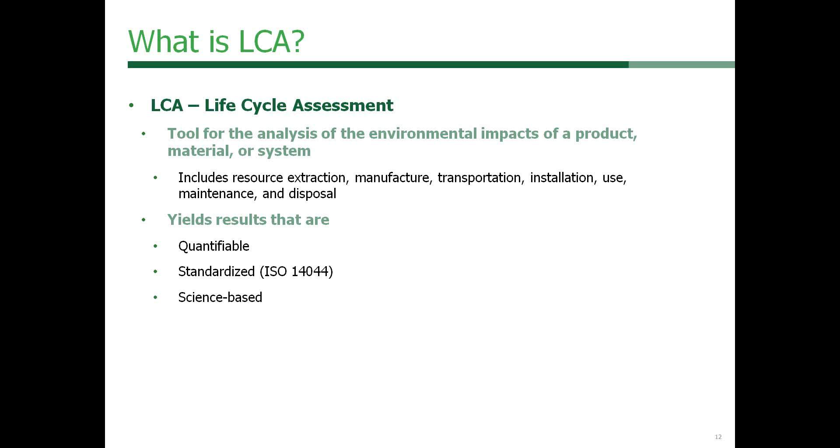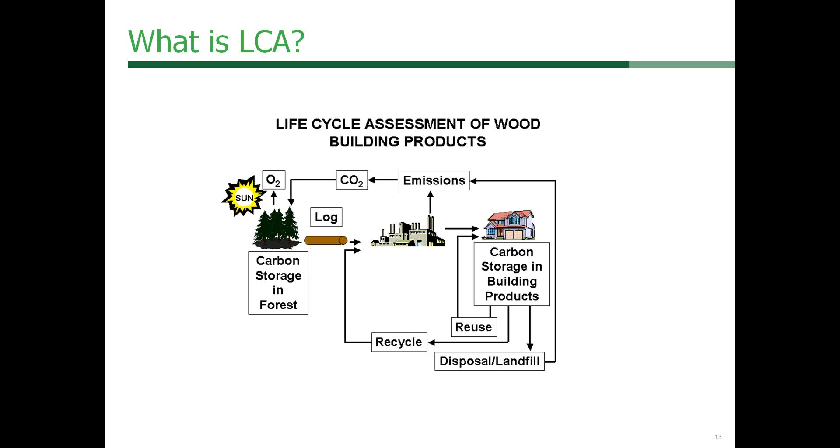So what tools do we have for life cycle assessment? The National Green Building Standard says that all tools used in LCA must be ISO 14044 compliant. They do have a provision for equivalent standards, but for the most part we're going to stick with the ISO standards since they are the most well-known and widely accepted.

Some of the more common LCA programs are SimaPro, GaBi, the Revit plugin Tally, the Athena Impact Estimator, and NIST's BEES program. SimaPro and GaBi are very comprehensive LCA programs and may produce more results than required for the NGBS analysis. Programs such as Tally and the Athena Impact Estimator are more commonly used by engineering practitioners for their simple user interface. For those of you already using Revit as part of your building information modeling scheme, Tally is a simple plugin that interfaces with Revit and allows you to perform an LCA rather quickly. Athena Impact Estimator is a free program available on Athena's website and can be used for whole buildings or products and assemblies.

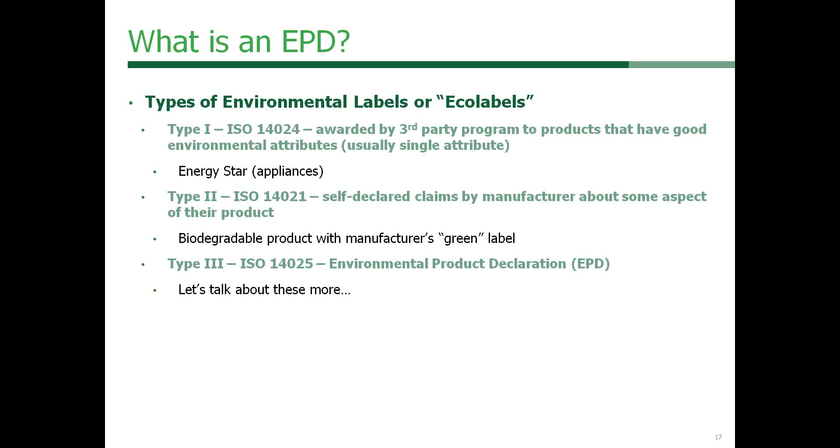A Type 2 eco-label is a self-declared claim by a manufacturer about some aspect of their product. For example, a biodegradable product with a manufacturer's green label would be a Type 2 eco-label. Type 3 eco-labels are known as environmental product declarations. These are governed by ISO 14025, and we're going to talk a little bit more about these.

The definition of an environmental product declaration, or EPD, is a concise, standardized, independently verified report on environmental performance. ISO has several standards dealing with EPD development. For us, the relevant ones we deal with are ISO 14025 for Type 3 EPDs, ISO 14040 and 14044, which govern life cycle assessments, and ISO 21930, which are the product category rules and EPD for building products.

So the EPD process can seem a little long and convoluted, and it is certainly not something that happens overnight. You start with your program operator, who then has general program instructions and product category rules which dictate how the LCA is performed. In turn, the LCA guidelines can influence the product category rules. This then leads to the development of an EPD, which is verified by an independent third party.

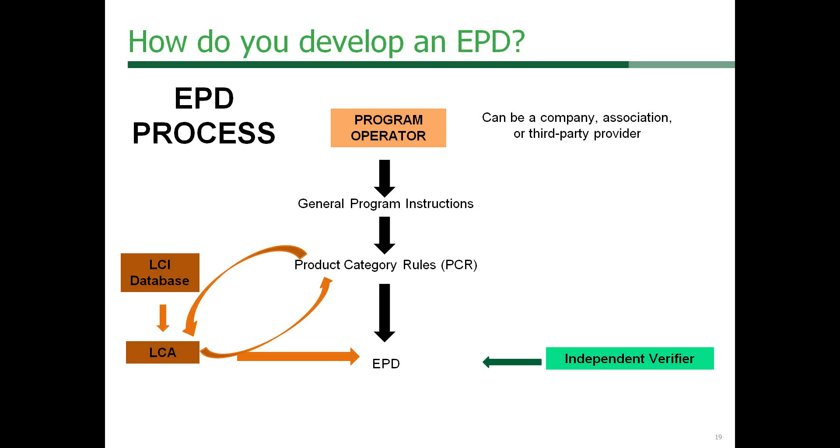The responsibilities of the program operator are set out in ISO 14025, and they include to adopt, adapt, or develop product category rules as necessary, review and verify the EPDs, and ensure all standards are followed. Typically, a program operator retains a third-party verifier for the verification of EPDs.

The American Wood Council and Canadian Wood Councils chose UL Environment as our program operator in the development of our EPDs for wood products.

Product category rules specify parameters to be considered for a given family of products. The North American PCR was developed by an organization called FP Innovations, who in turn based that PCR on the one from the Norwegian EPD Foundation and the German Institute for Construction and Environment. UL Environment then adopted FP Innovations' PCR for North American wood products.

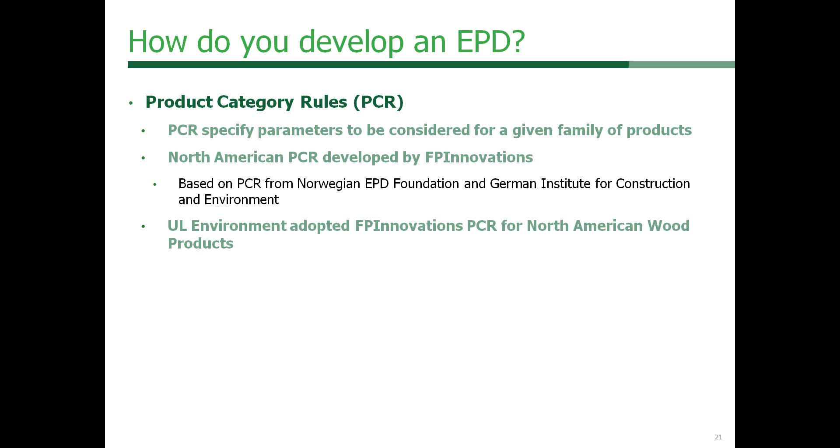So in order to produce consistent LCA studies for similar products, a PCR provides system boundaries for the assessment. This is how a PCR ensures consistency and, in some cases, comparability of EPDs across a category of products that serve the same function.

Our life cycle inventory data was collected by a group of university researchers known as CORRIM, the Consortium for Research on Renewable Industrial Materials. CORRIM started collecting data on various stages of forest products harvest and manufacture back in 2004, and then further broke that data down into modules that reflect the environmental impacts of harvest and reforestation, transport of logs, and manufacture of wood products in various regions. CORRIM then developed the LCA reports necessary to comply with the PCR requirements, which led to our EPDs.

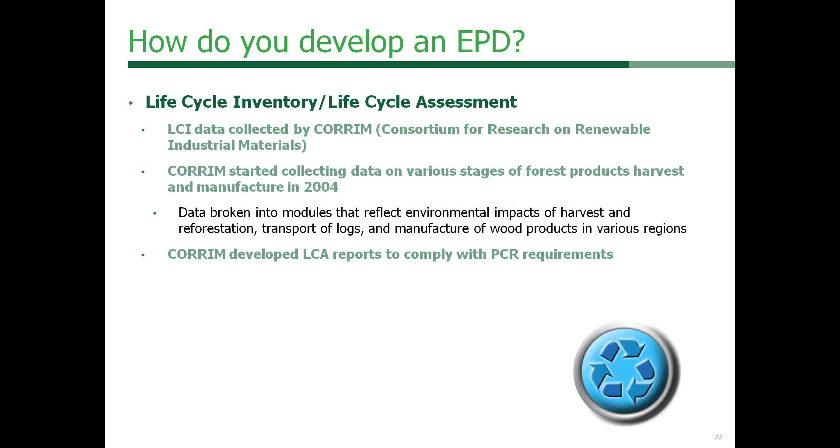So, as I said, the EPDs are based on these LCA reports, and EPDs produced under the FP Innovations ULE product category rules report global warming potential, ozone depletion potential, acidification potential, smog potential, eutrophication potential, and some additional LCI data including primary energy consumption, material resources consumption, and non-hazardous waste generation.

So, next we'll talk about EPDs for the North American wood industry. The American and Canadian Wood Councils have published 9 EPDs so far for softwood lumber, softwood plywood, oriented strand board, glue laminated timbers, LVL, wood I-joist, medium density fiberboard or MDF, particle board, and redwood decking, which was actually developed in cooperation with the California Redwood Association.

Additionally, the Western Red Cedar Association has an EPD for cedar siding, giving a total of 10 EPDs for wood products. Additionally, we have 2 pending EPDs that we anticipate on releasing soon, one for LSL and one for fiberboard.

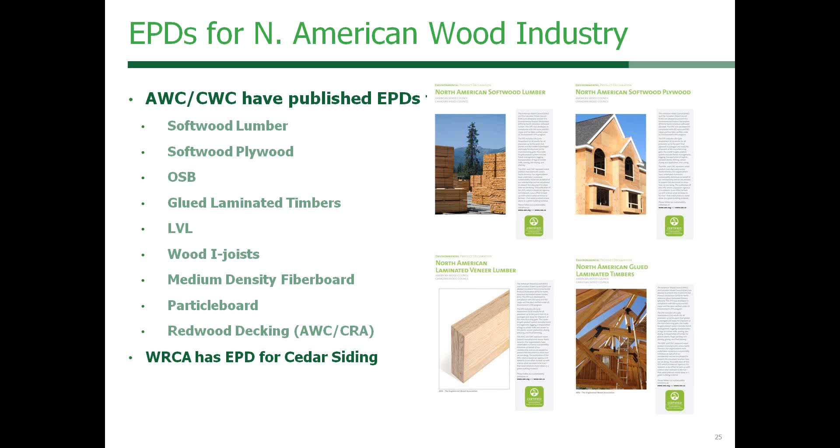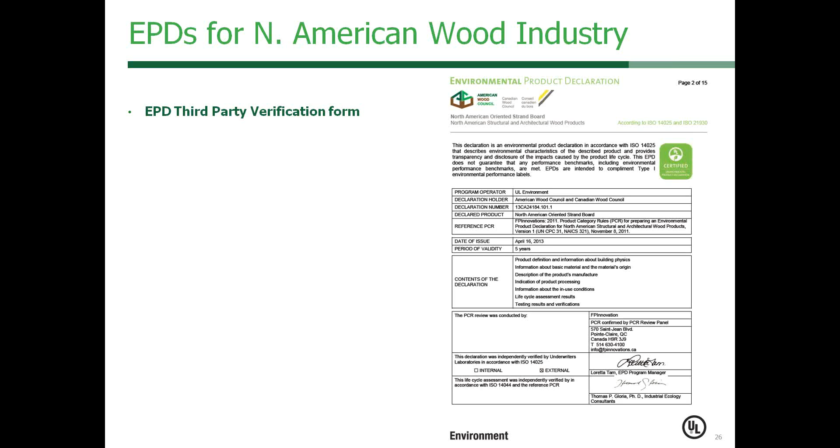Most of our EPDs are business-to-business, or B2B, in scope. The exceptions being redwood decking and cedar siding, which are business-to-consumer, or B2C, in scope.

B2B scope is also called cradle-to-gate, and B2C scope is called cradle-to-grave. Cradle-to-grave scope indicates the LCA accounts for all life cycle stages from resource extraction through the manufacturing and use stages, all the way to the end of life stage. However, the multitude of potential uses for wood products makes a cradle-to-grave EPD nearly impossible, as it's very difficult to ascertain how folks are going to use their wood product.

With this in mind, we developed ours as cradle-to-gate, meaning that the resource extraction and manufacturing phases are included in the LCA, and the system boundary ends at the manufacturer's gate where the product is ready to be shipped.

The LCA system boundaries are shown in the EPDs and show what's included and what's not. The system boundaries are specified in the product category rules. The results of LCA studies are very sensitive to these system boundaries, and different boundaries can give different results for the same product. For example, seedling and greenhouse operations are not included in our EPD. However, planting, including the preparation for planting, is included in our EPDs. Again, these are specified in the product category rules.

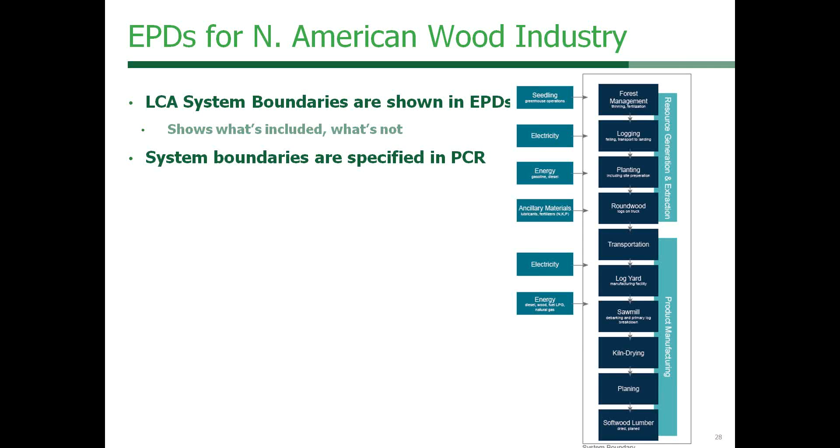How are EPDs used? One of the main uses right now is in green building certification programs. LEED V4, the most recent version of LEED, has a materials and resources credit up to 2 points out of 100 that can be earned using EPDs. Green Globes will allow you to earn up to 20 points, although obviously this is on a much larger point scale. It also allows designers to make informed choices about their building products and allows manufacturers to analyze areas where the products perform well versus opportunities for reducing potential environmental impacts.

EPDs cannot be directly compared if the scope is different. However, if they are based on the same PCR, they can be compared.

So we're going to pause here for our second poll question.

Oops, sorry, I always forget to take myself off mute. I am so sorry about that.

No worries. All right. All AWC EPDs are B2C, cradle to grave in scope. True or false?

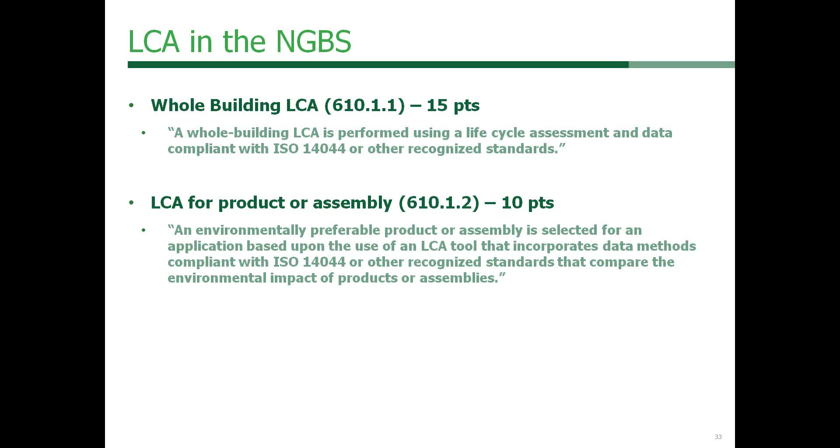So we're going to start with the smallest and work our way to the largest. A product LCA requires you to compare 2 or more products for improved environmental impacts in fossil fuel consumption, global warming potential, acidification potential, eutrophication potential, and ozone depletion potential.

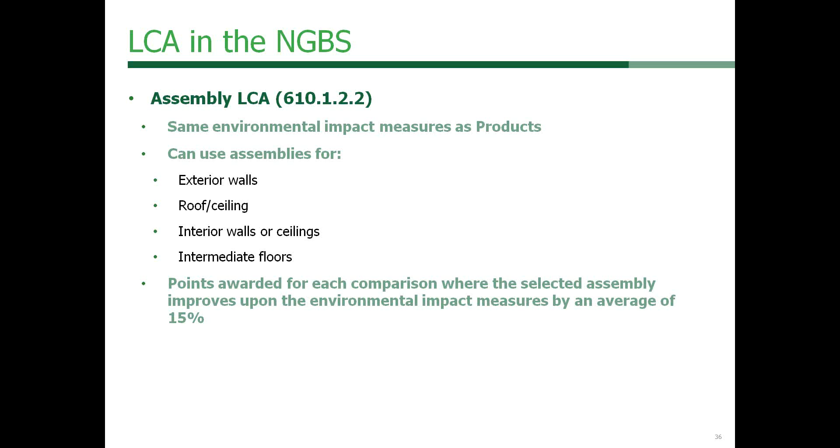An assembly LCA uses the same environmental impact measures as the products and allows us to make comparisons for 4 different assemblies: exterior walls, roof ceiling assemblies, interior walls or ceilings, and intermediate floors. Points are awarded for each comparison where the selected assembly improves upon the environmental impact measures by an average of 15%.

Similar to products, the assemblies earn points based on the number of assemblies and the number of impact measures. So for 4 different types of building assemblies, each with improvement in 5 impact measures, we can earn up to 10 points.

Each impact measure does not need to improve by 15%, just the overall average. So if you have a product or an assembly that has improvement in 4 impact measures, but for whatever reason shows a negative improvement or is worse in 1 impact measure, that doesn't mean you can't use it to earn points. You just will only get the credit for the 4 impact measures.

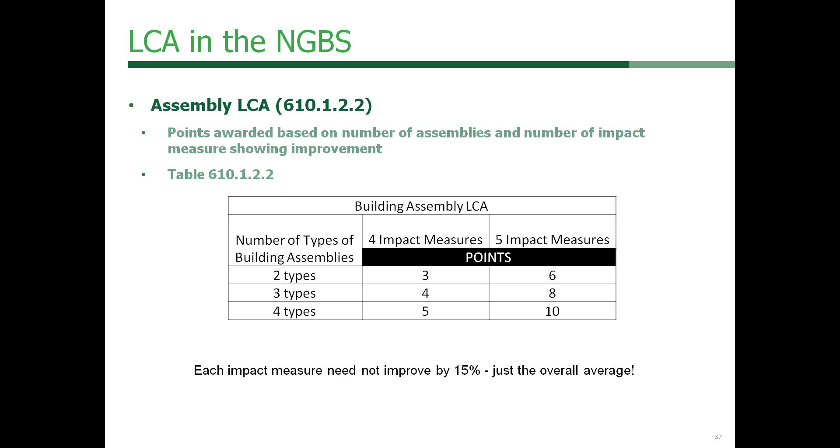All right, global warming potential is not one of the impact categories that must be compared between LCA analyses in the NGBS. True or false? I'm so glad you all start voting before I finish, so that's great.

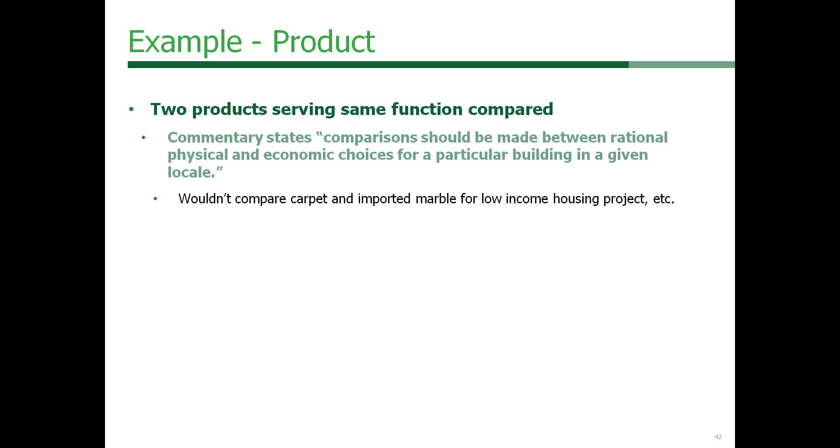Now, there aren't any code requirements. However, the commentary does state that comparisons should be made between rational, physical, and economic choices for a particular building in a given locale. So if you're doing a low-income housing project, you don't want to compare carpet and imported marble for a flooring choice. You would want to do a more rational comparison, such as carpet and laminate flooring, perhaps.

And the first thing that you need to do is select the weighting. Now the weighting in BEES can be very subjective. You can choose no weighting if you prefer that, or you can choose the BEES stakeholder panel weighting. They also have custom user inputs available, so you can choose any weighting or no weighting if that's what you prefer. For our comparison, we had to select a major element, so ours falls under the shell major element.

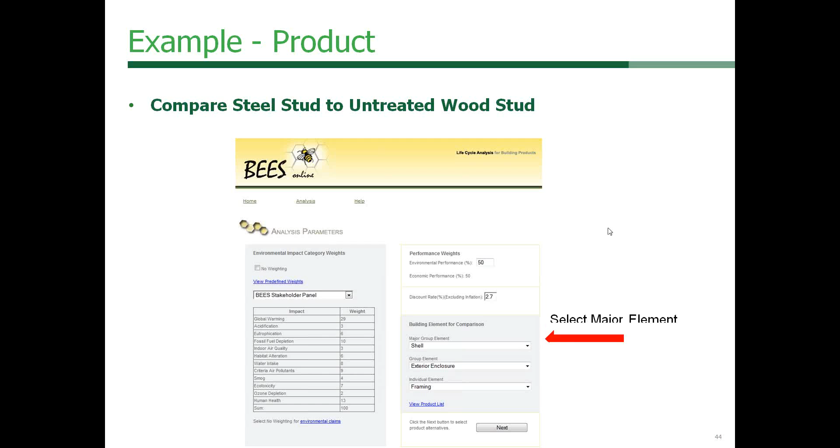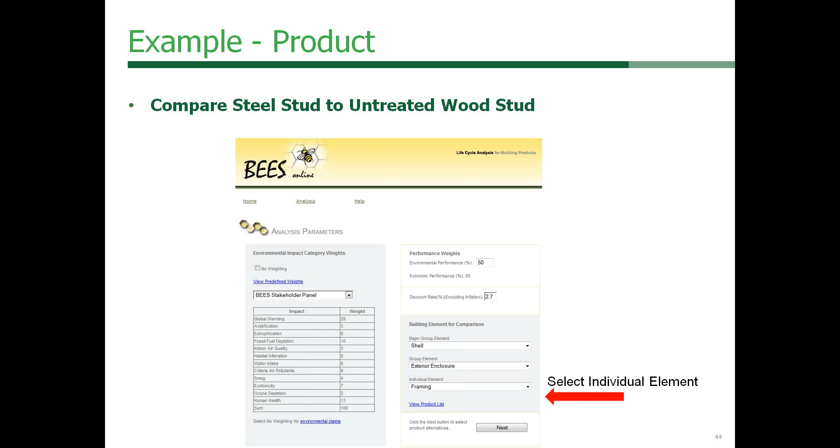And an exterior enclosure group element. For this comparison, our individual element is framing. So then we click Next, and it gives us some product alternatives.

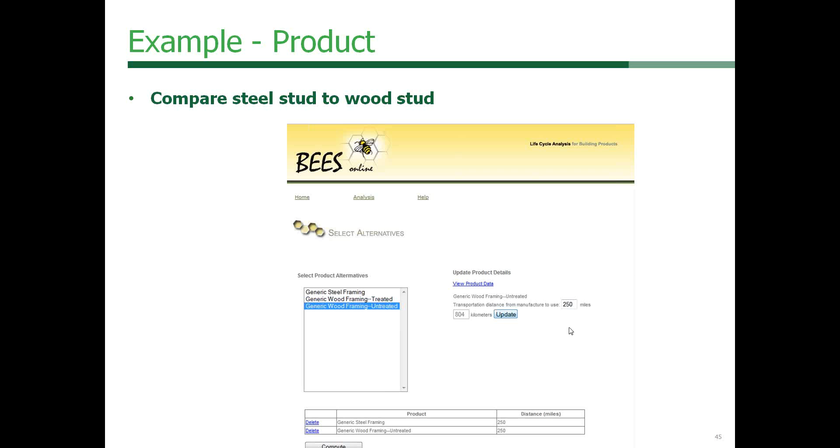For this comparison, we chose a generic steel stud and a generic untreated wood stud with a transportation from manufacturer to use of 250 miles. After selecting the products you wish to compare, you simply click Compute, and BEES will give you some results.

All right, I see we have a question coming in.

What is the process of defining the default product assembly to which we compare our design? This is actually a very good question and something that a lot of folks have struggled with. There's no process that's actually defined in the standard, so you can choose any product to compare against your final product that was selected. However, you want to make sure that it's a rational comparison.

You don't want to be comparing something that you want to use in your building with something that there is no way you would ever put in your building, such as comparing carpet to marble flooring for a low income housing project. So it's up to the designer to choose your baseline or reference material, but the NGBS does want you to be rational about it and not use an unreasonable product to compare for your project.

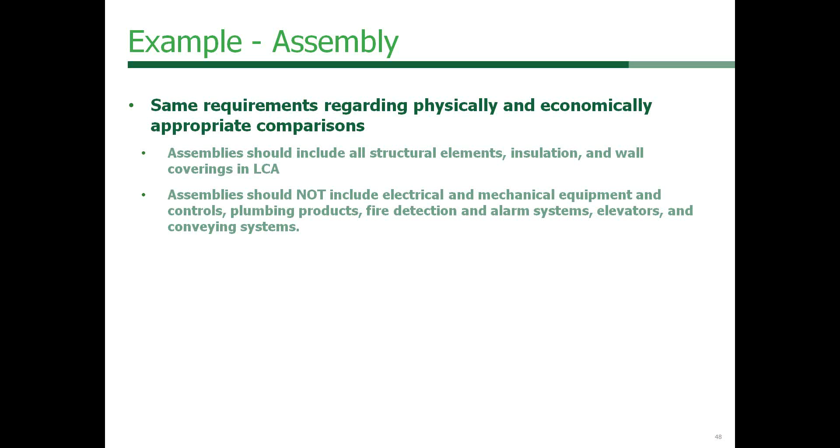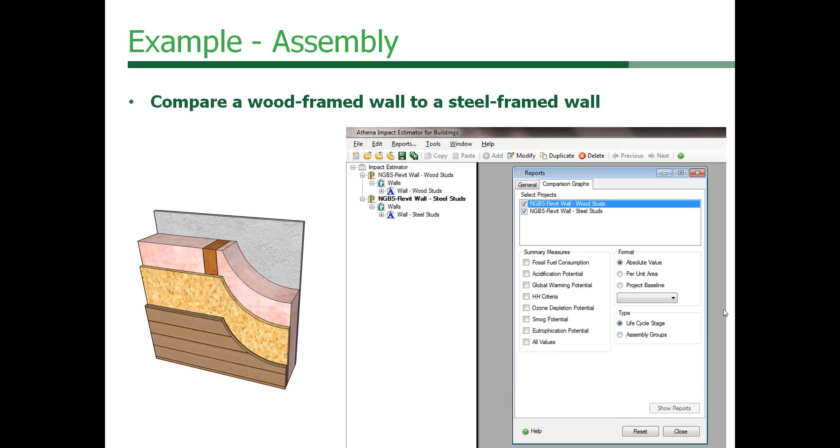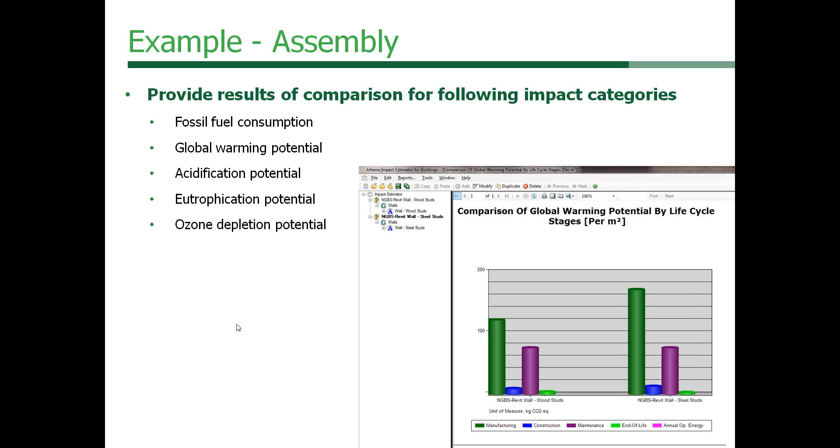Our last example is our whole building LCA. This is the most rigorous, but also worth the most points. As I mentioned before, in the 2012 NGBS, no comparisons are necessary. You simply have to perform a whole building LCA with an ISO 14044 compliant tool.

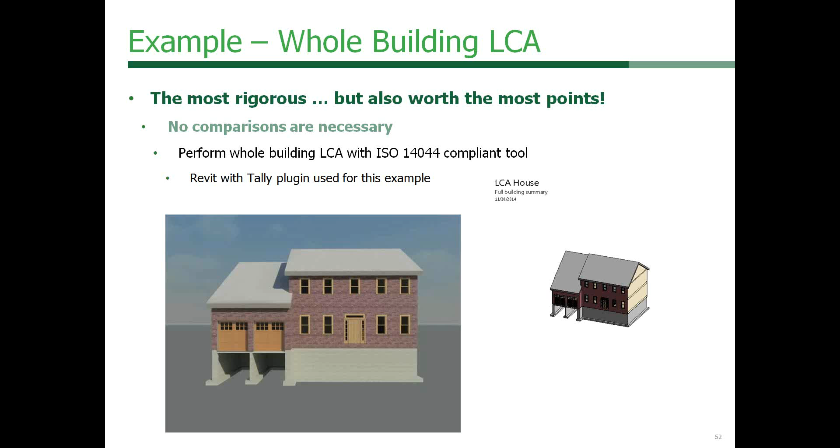For our example, we used Revit with the Tally plugin. One thing that Tally doesn't include is on-site construction impacts. So if you're trying to build two LCAs using, for example, Tally and Athena, you can run an LCA on an identical assembly or structure, and you'll get different numbers. One of the reasons for these differing numbers is the inclusion of on-site construction impacts in Athena, but not in Tally. So Tally does not include the on-site construction impacts.

So the Tally interface is just a plug-in on Revit. You'll build your building model in Revit, and then you can run your environmental impact assessment or life cycle assessment of your environmental impacts in Tally. You'll be able to choose what you want, any materials that are necessary to include.

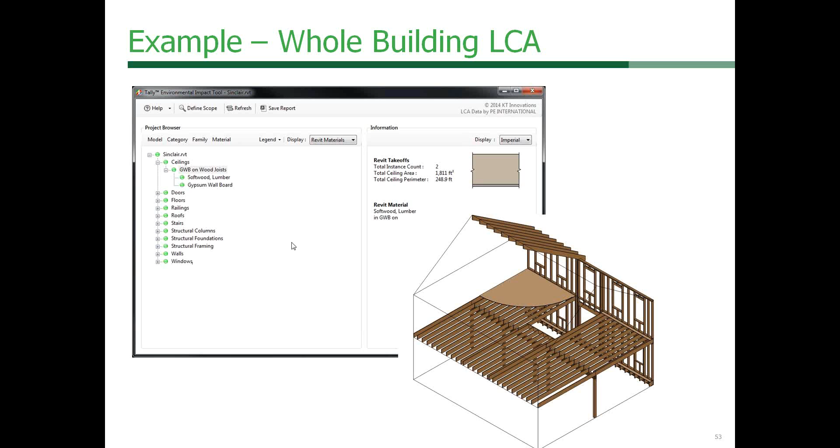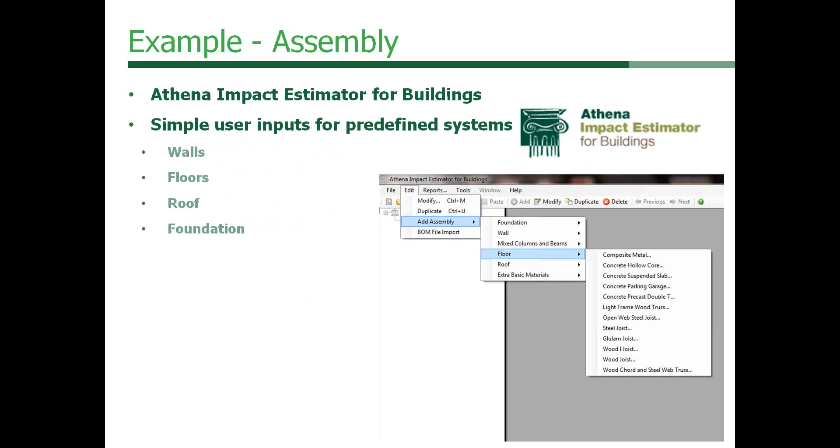So, all right, and then from there, we have our fourth poll question. Which of these LCA options does not require a comparative analysis between two or more options? Is that A, whole building, B, product, C, assembly, or D, component?

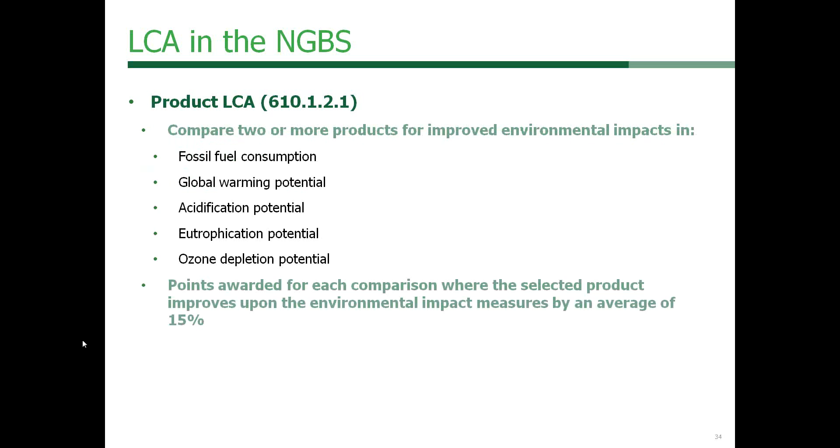Yeah, I understand. Let's go back to our categories. So that is correct, that you can earn credits by using the other 4 impact categories, but the question was more intended to reflect this list of environmental impacts, and that global warming potential is one of the impacts that you generally would consider. So if you go to the next slide, where it talks about 4 impacts versus 5 — yes, you can get away with not using global warming potential as one of them, but then you would need to use the other 4. Great. Glad we could clarify that.

Here's another question. It says, the NGBS is being updated — do you know whether there are changes to the LCA credits? Yes, actually there are. As I mentioned, the new standard is being worked on. It's anticipated to be completed this year and available in 2016. And there are some changes to the LCA provision, but the tools that we talked about today will still be relevant.

The whole building assembly and product life cycle assessments are still recognized, but the most significant change is the provisions for the whole building LCA. In 2012, we simply had to perform a whole building LCA — there wasn't a baseline building or a reference building that we had to compare it with. For the 2015 NGBS, you not only need to perform an LCA of the final building, but also a reference design building. So these tools that we use to perform our whole building LCA would still apply, but we will have to make a comparison for whole building LCA in the 2015, which we did not have to do in the 2012.

Okay, great answer. Here's one: how does AWC help determine environmental impacts of solid wood products versus composite woods, especially those that use chemical resins or binders, but may benefit from using smaller scraps of wood and recycled material content?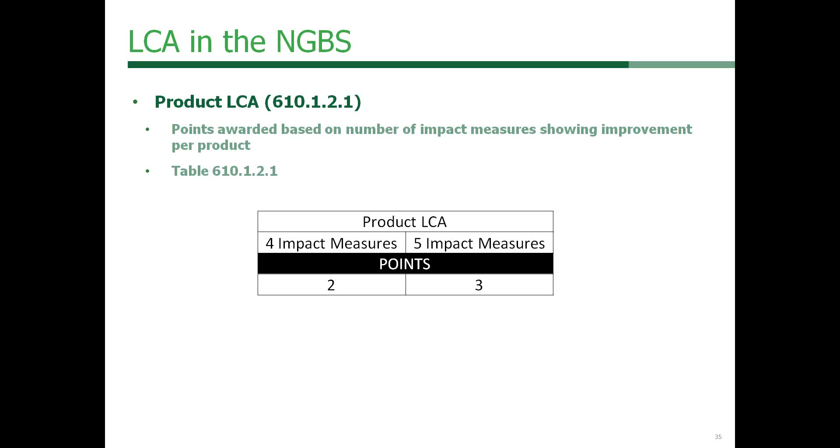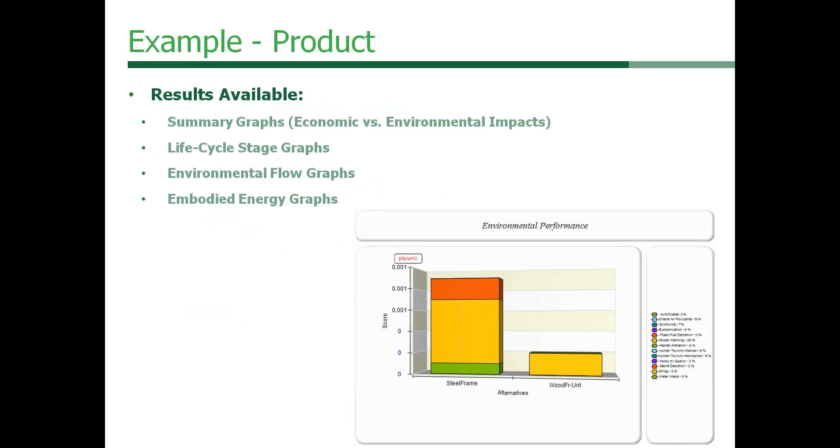Also, the Athena Impact Estimator - you can go to Athena's website, athenasmi.org, and it can be downloaded for free from there.

Now, this is something I'm going to throw at you, sorry - can you show people where our EPDs are on our website? Yeah, sure, let me navigate and pull that up for you guys. You have to get out of presentation mode, and hopefully...

I think you have to show your desktop though - change your screen mode. Oh okay, all right, do you know how to do that? Yeah, just a second, let me make sure you have all your games closed. Yeah, all right, I'm going to lose my place though. If my computer wants to cooperate, let's see.

So for our EPDs, they are going to be under our green building tab, and when you hover over that, you'll see our drop-down menu, and you can go click right here on EPDs, and all of our EPDs are shown, or they are downloadable here on the right side of the page.

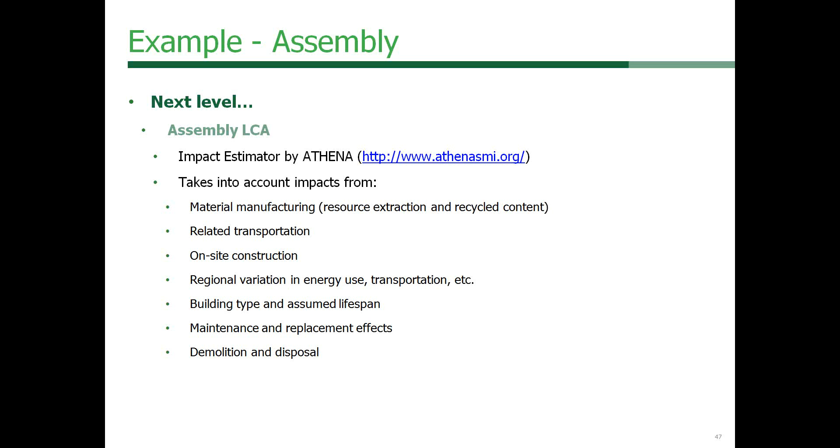Okay, and then we have one more question. As a specifier, how do I know if a manufacturer's product can be used on a LEED green building?